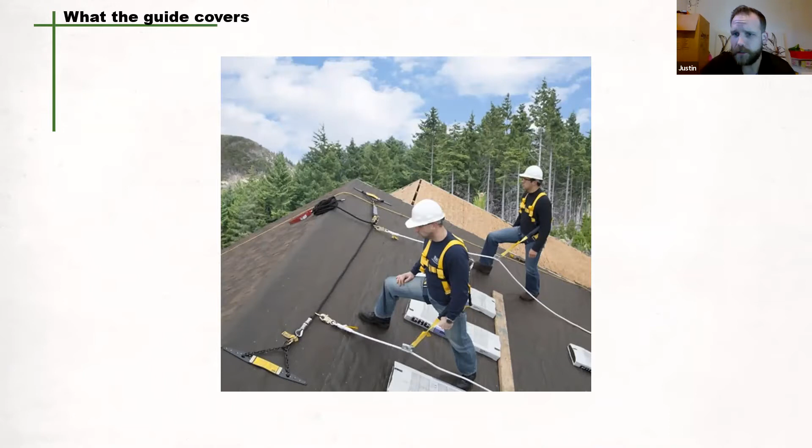So the facilitation guide, designed in collaboration with WCB, covers these topics: are workers receiving proper training on fall protection? And proper training is defined as a course that has both a theory and practical component.

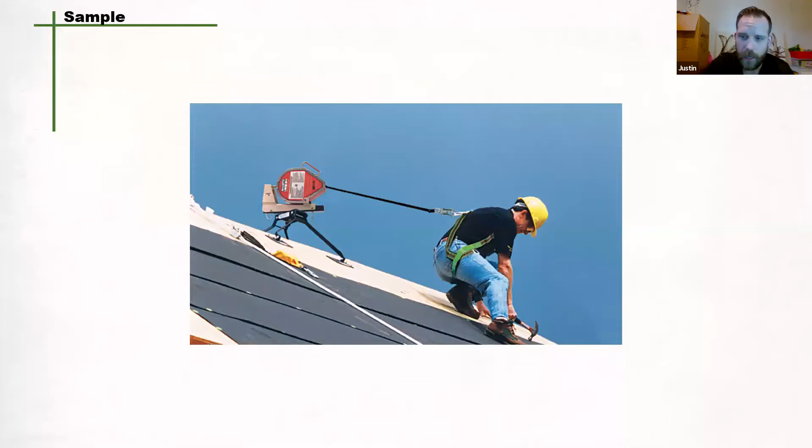So each focus group or interview began with a general introduction and explanation about the process, including the idea that discussions were exploratory. There are no right or wrong answers, just opinions, perceptions, and what each person thinks based on their own experiences. The importance of individual opinions and frank discussions, even if it is different than what others in the room are saying. And assurance of participation confidentiality. The opinions are aggregated, not attributed to individuals. The names of participants are not shared or attached to a written summary.

So when we talk about the discussion results, which is coming up here. According to the focus group participants, at least some fall prevention measures are adhered to on the majority of all residential construction sites most of the time. It's actually some good news. These measures can take a variety of forms, including setting up control zones, netting, guardrails, or having workers wear personal fall arrest or travel limiting systems. The majority of supervisors and workers generally feel safe. Many actually say very safe when working on residential construction sites.

Job sites are generally kept clean and assessed for safety issues and assurance that OH&S standards are being adhered to prior to getting jobs underway. Some supervisors who have worked in both industrial and residential construction, however, suggest that the larger commercial or industrial construction companies emphasize stricter adherence to safety procedures and practices than do residential construction companies. Although most companies adhere to safety standards, the perception is that small residential companies seem to be less likely to have fall prevention measures in place on their work sites.

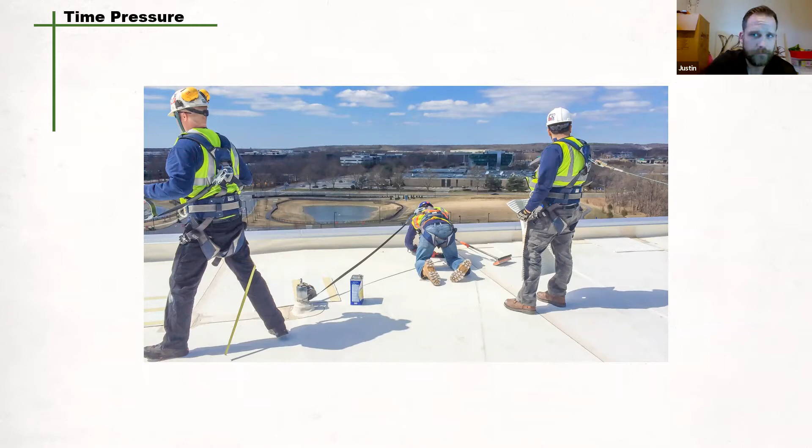The next one is small tasks. Fall prevention is sometimes, some participants even say often, not used when fulfillment of a small task at height is required. Rather than ensuring prevention measures are in place through proper planning prior to doing a small, quick, or seemingly innocuous task, workers will do it without safety precautions. This behavior can occur with all workers, even if they do not do it regularly, and most suggest they do not. Most also admit they have done without safety precautions at one time or another.

Another contributing factor is confidence in their experience, skills, and common sense, which makes them think they can complete a task without the risk of injury from falling. So confidence and ability, which comes with experience, and competence can actually cut both ways, and in some cases, lead to unsafe behavior. A common situation where unsafe behavior at heights is more likely to occur is when workers are finishing up small tasks when using protection measures takes up more time than the actual work.

For example, rather than spending the significant time it would take to install fall protection on a roof, a worker who has only spent a few minutes working on a vent as part of a plumbing job might forego safety measures.

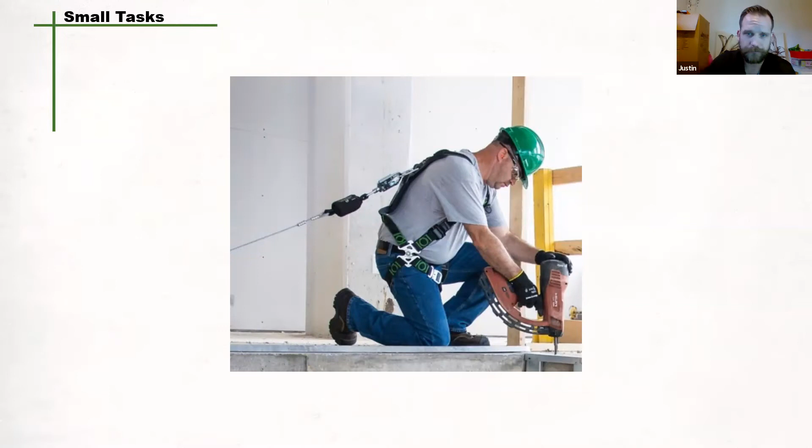On homes being renovated, however, these anchors must be installed by workers who free climb to the anchor point without tie-off protection. In some situations, this is considered more of a risk than doing the task or job they need to do on the roof without the fall protection. It is evident in the discussions that supervisors are sometimes challenged with this situation as well.

Some workers and supervisors also express concerns about tripping on the many ropes when travel limiting systems are used by several workers. Trip hazards from fall arrest systems are particularly challenging for framers working within trusses and can pose a hazard in themselves. Tangle hazards can be exacerbated by cords from power tools.

Some companies use retractable lines to reduce tangle issues, but some workers think the tension they put on the line slows them down. Participants also mention issues with tie-off points that are not properly installed, can't take the weight of the fall, or have rust that is not visible under cladding.

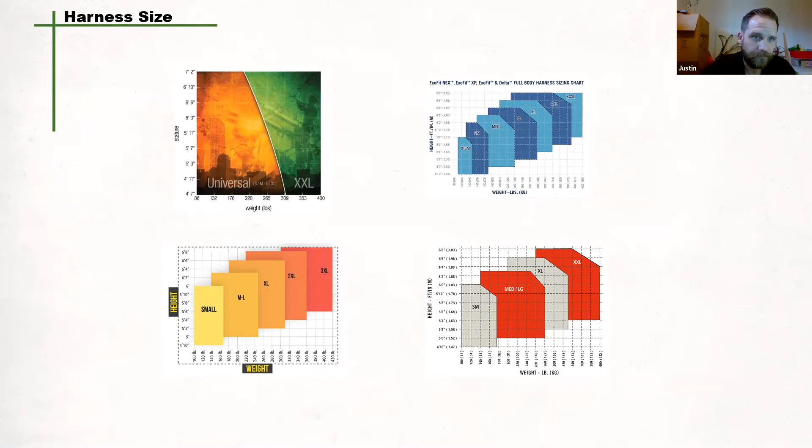So the first one that we show here is 3M. Now, where this is different than a lot of other brands is their universal size covers everything, right from that small, medium, large, extra large. And you can see where that weight limit, at 4'7", 309 pounds, 310 pounds, if you were 4'7", that's where you would require that XXL. And you can see as it kind of crescendos up, where you would line up if you were requiring an extra large harness.

So, if you were 6'6" and 300 pounds, you're going to need that double XL harness. But if you're 6'6" and you follow the lineup and say you're 250 pounds, you only require that universal size harness. So before you buy the harness, whenever you go to your supplier, not everybody is comfortable with their height and weight, but this comes down to a safety factor where you need to choose the right harness. Whether you do that on your own or you ask a representative for assistance, you need to make sure that you're fitted with the right size harness.

So 3M, from what I found, has the largest gap between the small and the double XL. Yeah, so Justin. Yeah, go ahead. Just run back to that universal slide, please, with the 3M. Sure. So that 3M, can you imagine the difference between a 4'7" human being at 88 pounds?

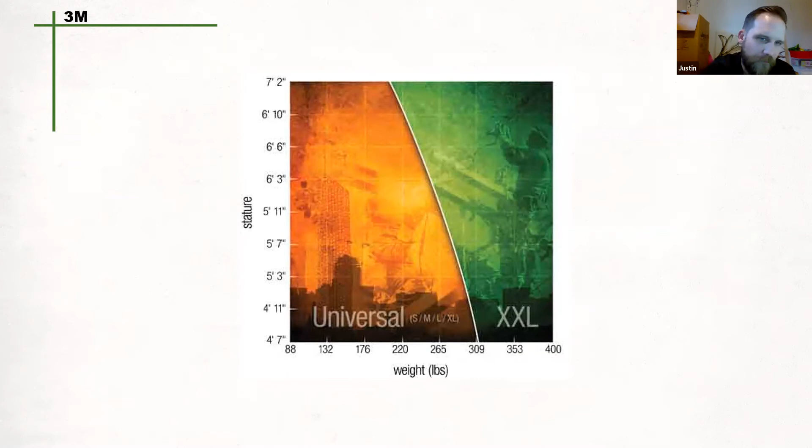So I think I got 5 manufacturers here to quickly run through just to give people a visual. So now you can see from the last slide where there was just this small XL and then double XL was the only change up. When you look at the SALA, you look at that same kind of area, that 80 pounds, 4'10", all the way up to 6'8", 420 pounds. But you can see the increments, there's a lot of crossover between the height and weight ratios.

So this is why it's so important, someone like myself running in at 5'10" or 5'9", whatever you want to say, and I'm around 185 pounds, that medium is going to be perfect for me. Right. But it wasn't too long ago that I was about 156 pounds, and my height hadn't changed. I'd be looking into that small harness, right on the edge of wearing that small harness. So like you said, Mike, trying these on, actually putting one on before you buy, it's not the worst idea.

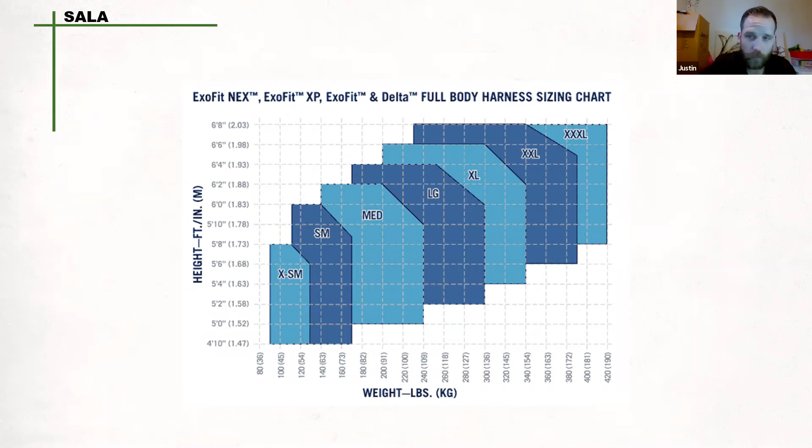So when we look at the Guardian, again, this follows the same kind of area. The one difference here being the medium large. With the medium large, you can see they leave a little bit extra for adjustment with that size, just because that's your most common size, right?

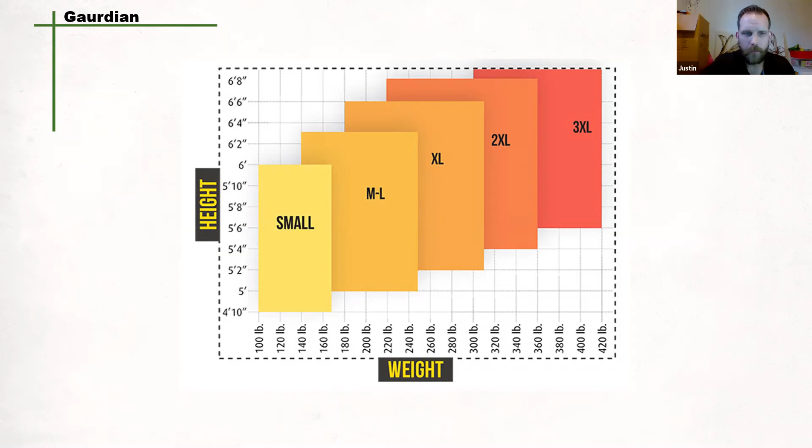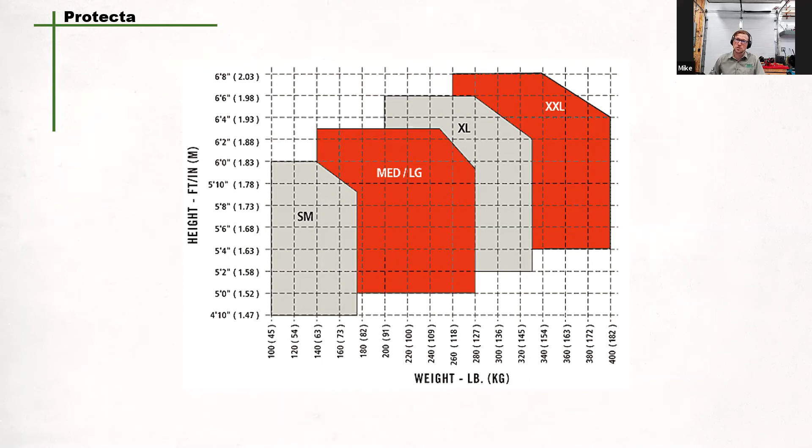And another thing besides strap lengths, Justin, is going to be the actual rating for the harness for weight. Some of these might actually have a maximum weight rating. Maybe you're at the max height and max weight of that harness, but you're a little bit over the max weight, and you can still get the harness on. So maybe you could still get it on because you hold your weight in your ankles. I don't know where you're getting all this weight from, but you put it on, it still fits you. It's a false sense of security, and you go through a fall, man, and you got straps ripping. That's not going to be a fun situation. It's really a false sense of security if you're not looking at the labels.

Yeah, absolutely. And we see that a lot with very, very muscular individuals that have a lot of compact muscle tissue, coming in at 5'8", 5'9", whatever I am,

just keep getting shorter. Yeah, exactly. Just get honest. Mickey Rooney before you know it.

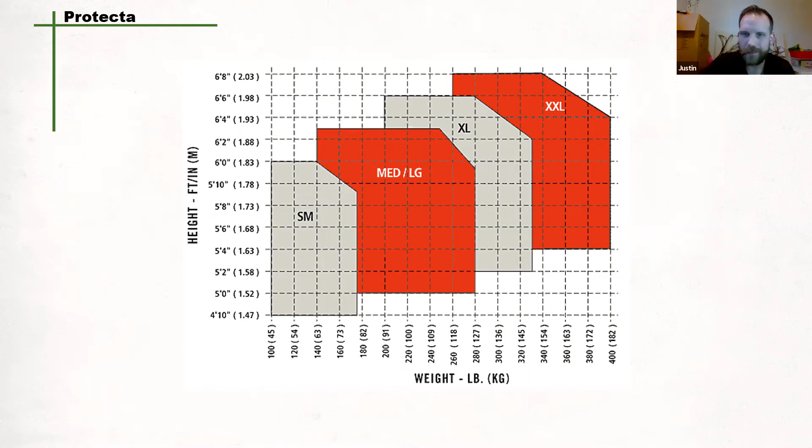You know, someone that has a lot of dense muscle tissue that runs in at 5'8" or 5'7", but all of a sudden they're 260 pounds because they're a really large individual and pack on a lot of muscle tissue. They might have to look into a different retailer or different brand because they might be under the height, over the weight. It might be a weird place to be. It's generally not the case, but it's really important to look into these and figure out what exactly is going to work for you.

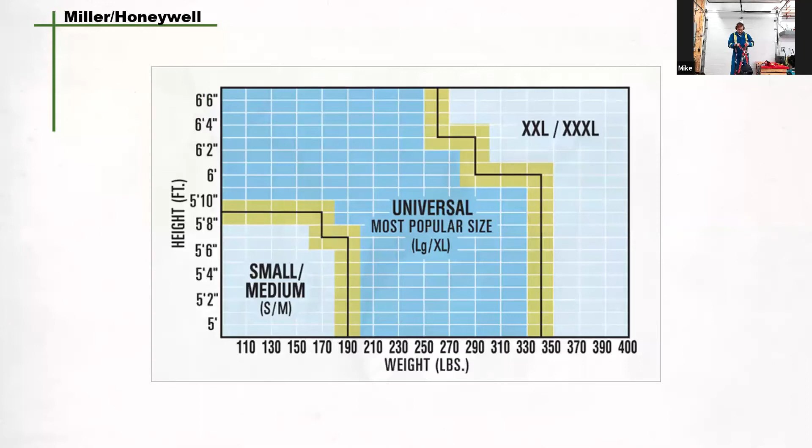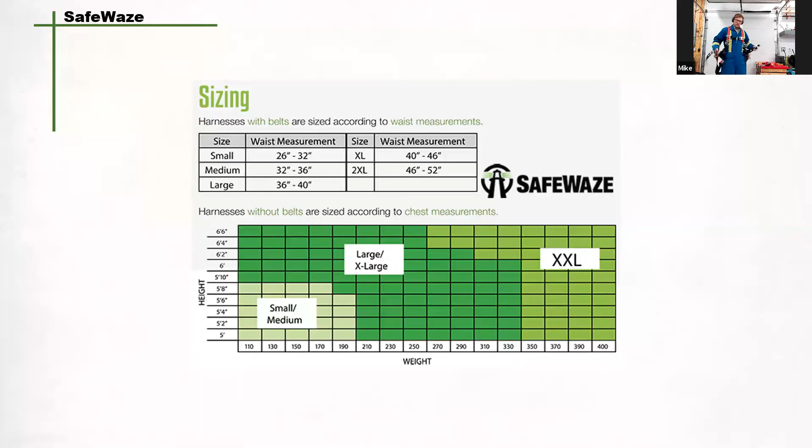Actually, if you want to just exit the PowerPoint for a sec, we'll come into the shop here. I want to show you a harness that actually has a belt system in it. I have to get this thing on correctly. Can you see me, Justin? One sec. Stop share. Here we go. There we are. Thanks. So here's a harness.

Now I'm wearing insulated coveralls, so I fit a little bigger than I actually am underneath. But when I try to put the belt on this system, this is a belt right in here, and this is actually a harness that I could use, I believe for window washing or something, where I can have a seat integrated into it. This is an XL harness. Now, this belt, I put it on as tight as I can get it, and I still have a lot of room in here. I'm not going to be able to get these done up properly. It's going to be very ill-fitted.

Now, can I use it? Sure. Can I fall in it? That's the question. If I go through a fall, what's the level of protection I'm going to get? How's it going to fit? Is this strap going to end up around my neck? Am I going to end up with a groin injury because the straps around my legs don't fit my huge 180-pound legs on an extra large harness? And look at all this strap I've got to deal with. So I have a lot of problems wearing the belt system, with it not fitting.

The issue comes in, I would say, in complacency, or the devil's in the details with all fall pro, right? It's always the details that are going to get you. So I'm sitting up there and I can sit nice in this harness and it just happens to be hanging up like this, right? And I'm sitting in it and I'm washing my windows or doing some glazing or something. And it isn't until I fall that I really realize the impacts of having the improper harness on, right? So, yeah, absolutely, 100%.

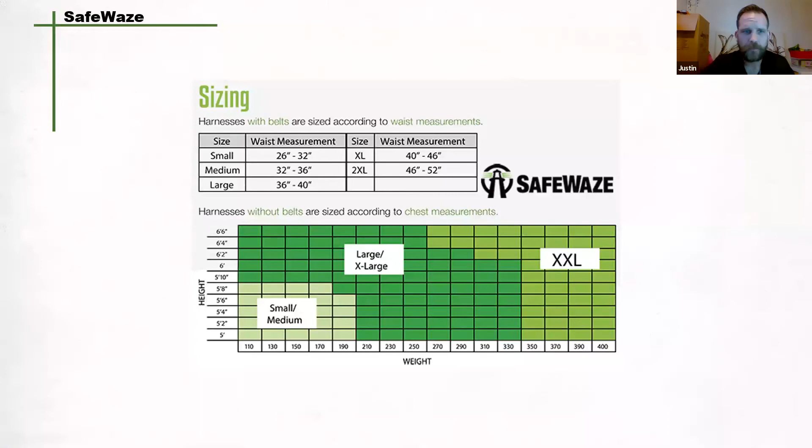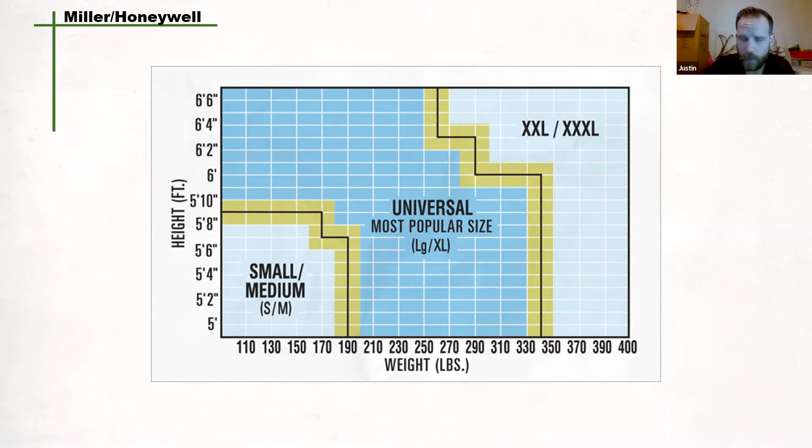So moving forward, this is the Miller Honeywell. They talk about their most popular universal size, and it runs by the same standard again, right? You can see how everybody's got a different way of showing how their stuff fits, but they're all in that same area of where they move up in sizes. Some go right from small to triple XL, just like the Honeywell here. The 3M has one universal size and then double XL, whereas this one goes right up to triple XL at 400 pounds, 6'6", right? So that's why it's so important to really research these sizes and know exactly where you and your employees land.

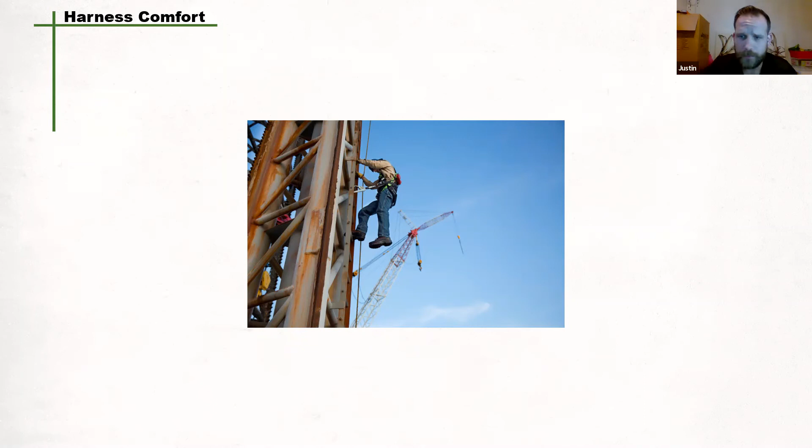Comfort and fit affect the safety and use of a harness, influencing compliance. If fall protection equipment is difficult to don and hard to adjust, it won't be used. With comfort in mind, workers use several different types of harnesses, but the majority prefer full body harnesses with stretchable webbing that allows them to flex and bend. A full body harness includes hardware, webbing, and pads with specific functions.

Hardware must be sturdy but not oversized and awkward. At the same time, hardware should be easily attached to connecting devices. For example, the back D-rings on some harnesses are so small that hooking a lanyard is a tricky process. Harness hardware must be smooth because it can pose a hazard if it has sharp edges that cut into harness webbing or dig into the skin in the event of a fall.

Hardware construction is an important feature, specifically in friction buckles. If friction buckles are not spring-loaded, they can easily begin to loosen once the harness has been adjusted to fit properly. Also, be aware of hardware with exposed springs, especially on friction buckles. These can be easily disabled or dislocated.

Webbing varies drastically from brand to brand. Look for sturdy webbing with tightly woven yarn that slides through hardware without snagging. Once webbing is cut, burned, frayed, etc., the harness must be taken out of service. When choosing webbing, keep in mind that it should meet the standard of 5,000 pounds of tensile strength. So it has to meet the minimum CSA standards. Stitching should have enough strength that it does not rip away during a fall, and the webbing should endure traditional abrasion tests without fraying and puckering.

Since webbing will be used in the sun, heat and moisture over extended periods of time, it should resist natural weather effects. Similarly, in electrical environments, webbing must resist conductivity, and in harsh chemical environments, webbing must resist toxic chemical fumes and splashes. In other words, make sure you have the right harness for the jobs that you're doing. Padding should be pliable and easy to adjust to ensure a comfortable fit. Like webbing, padding must withstand harsh weather and maintain its shape. Some padding can become brittle in cold weather, so look for padding with breathable fabric and durable construction.